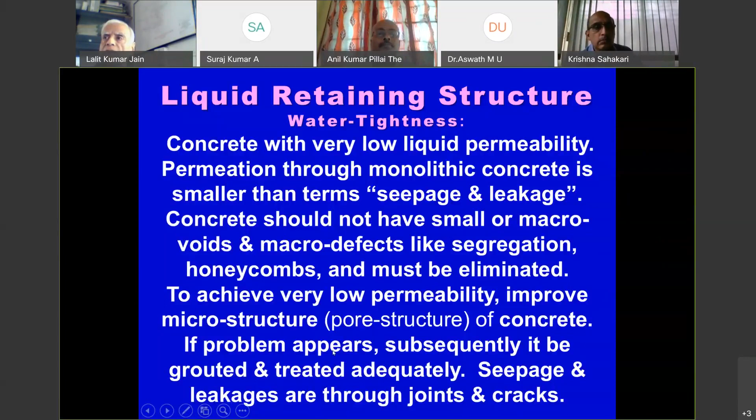Another concept introduced for the first time in this code is the H by T ratio. It is nothing but the pressure gradient driving water through a concrete section - the pressure of water on the concrete section at that point divided by the thickness of concrete. Assuming the gradient is constant throughout the thickness, the average gradient will be h by t. We'll be talking of h by t ratio very much in the code now, since leakage does depend upon h by t.

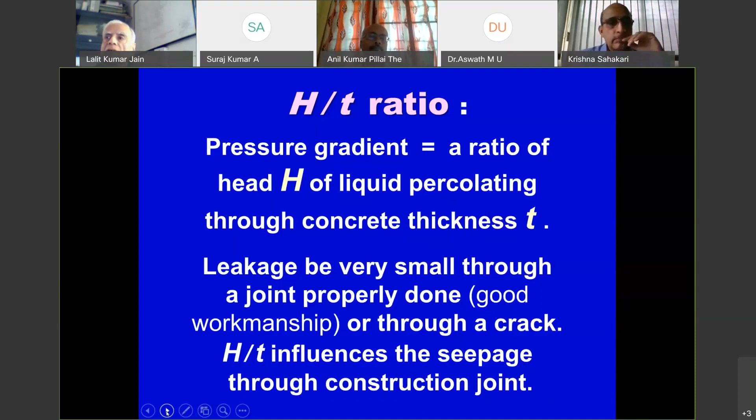Now we already know IS 3370 is in two parts. Part 1 is general features, salient features. We have added a clause on terminologies, and many of the terminologies are added. I've given you an example of construction joint: it is a partial discontinuity in the concrete during construction, an intentional joint which is finally treated to ensure monolithic behavior under serviceability and also under ultimate stage.

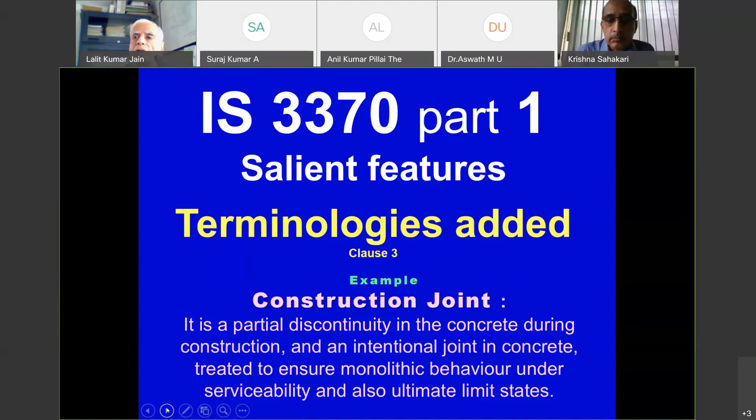Next, there is a clause on materials. It's a very brief clause because we refer for materials to our mother code, which is IS 456. In the guidelines I have given you, you may see a little more detail on the materials wherever needed. I want to make it very clear that blended cements or addition of SCMs, that is supplementary cementitious materials, are preferred for water retaining structures.

Today we get fly ash blended cement. We can directly use it, or we can add fly ash or GGBS during mixing to this concrete. So we can use blended cement. Clauses are there on aggregate, admixtures, jointing material, and reinforcement.

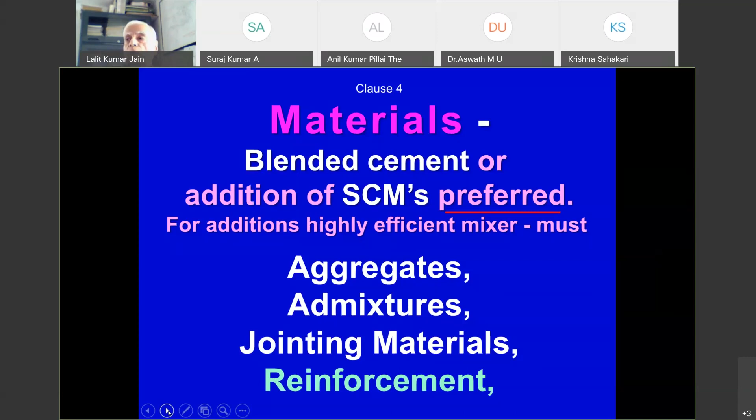Very specifically on reinforcement, I'll tell you that use of fusion bonded epoxy coated bar is included, because many people look into whether it is permitted in the IS code or not. So it is now permitted to use different types of bars, and not only these bars but other types also. But this bar doesn't straight away solve all our problems - we should take high care to avoid scratches in this coated bar.

In this coated bar, that is epoxy bonded coating, if there is a scratch, or what we call holidays or a pinhole position, the rate of corrosion can be 6-7 times higher than it would have been on an uncoated bar. So if those scratches cannot be avoided, then there is no use going for coated bar in the water tanks also. This present picture is from a work being done for an elevated tank in Mumbai.

Stainless steel bar is also permitted. We have another option of galvanized bars. Bonded epoxy coated bars have already been spoken about. India is manufacturing and exporting stainless steel reinforcement bar, but we are not using it - we can use it. But whenever you are using these different types of bar in combination with normal other steel, please note that there should not be direct contact between these different types of bars, and we have to insulate these bars from each other.

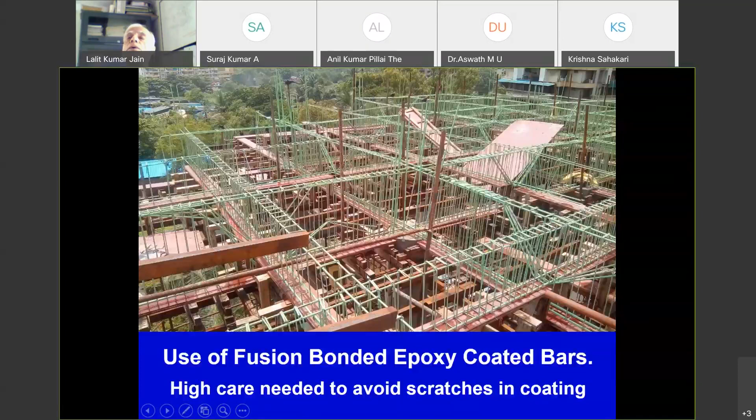We will look into what is exposure condition. We have been getting guidance on these exposure conditions from IS 456, and as per that, there are 5 exposure conditions: mild, medium, severe, very severe and extreme. As per that table of 5 exposure conditions, we place our water tanks in severe. So any member of a water retaining structure, or container or tank, we should design at least as exposed to severe conditions. Of course, in some cases we are exposed to very severe or extreme conditions.

For example, in a treatment plant, we have an alum solution tank. Now, alum is highly corrosive to concrete, and concrete cannot stand to it. So what we do is apply an acid-proof lining, simple China or tiles, what we use in our bathroom, so glazed tiles, that we can put. But the jointing material or pointing material is very important - we put acid resistant material there. So this is how we have to deal with it, and so we can have higher exposure conditions.

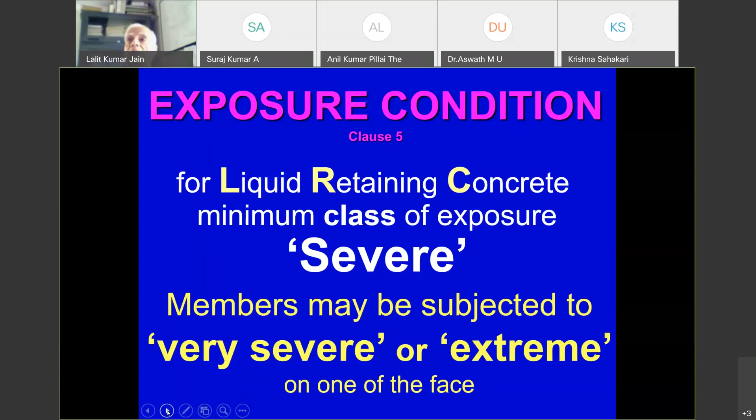We look into this beyond also something else. The modern approach is to recognize the deterioration mechanism which is responsible for loss of durability, and we have to design for durability. Knowing that mechanism, we have to select the grade of concrete, select the parameters, mostly permeability of the concrete in relation to the mechanism - permeability not only for water, but the transportability of many other things like water, solution, gases, ions and so on. Now, the materials which take part in loss of durability in all those mechanisms, we have to understand that and can design.

Many codes of standards are now talking of this approach, and it's possible, but a lot of data we have to collect for the type of concrete we are going to use, and parameters of the concrete, before we take this into account when we design it. So, for example,

the penetration of chloride into the concrete. Most of the time we are using chlorinated water, and chlorides are available throughout the life of the structure, and these chlorides penetrate into the concrete. So what is the rate at which it can penetrate, and when these chlorides reach the reinforcement surface, and this concentration of

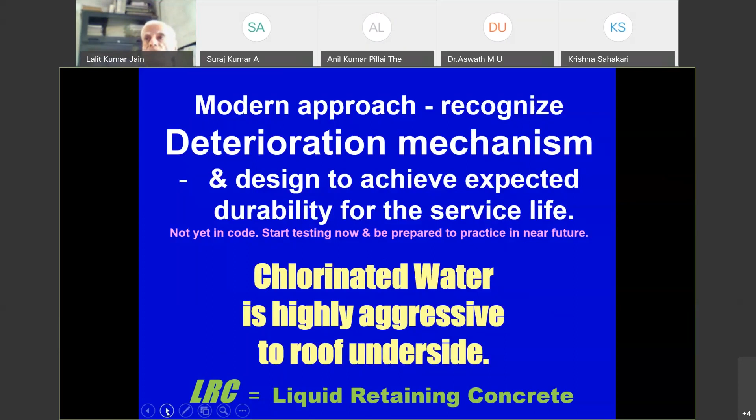Now this table 1 is as it was in the earlier code also, except that we have increased the binder content. Earlier, for reinforced concrete, about 320 kg was permitted. Now we have increased it to 350 kg - not cement content alone, but total binder, the cement plus SCMs, supplementary cementitious materials.

Basically, I recommend that we should not have consumption more than 400 kg of OPC or PPC, because if cement consumption or cement content is higher, the shrinkage will be higher. So if we exceed this, we have to account for shrinkage parameters and design accordingly.

The simplified guidelines given in the code regarding shrinkage design or minimum steel are valid for content between 350 to about 400 kg. Beyond that, those are not applicable, and we'll have to design for more reinforcement due to shrinkage, cracks, and so on.

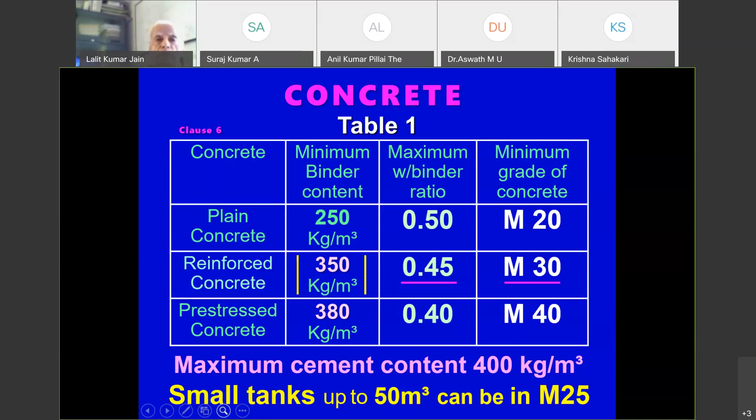Now here you can see that we permit the majority of water tanks in M30 grade, but to continue with the practices we had long back, we allow small tanks to still be done in M25 concrete. And if it is PCC, one can do it in M20 concrete.

PCC means though we put reinforcement, the concrete is safe even without reinforcement, but for temperature shrinkage we'll have to provide reinforcement. Whenever in this code we say PCC, it means some steel we are providing, but we are not depending on the stresses in steel for load bearing due to water load.

Now coming back to durability, corrosion of steel is most important in our water retaining structures. In buildings and others, you will find that carbonation of concrete is one of the important parameters. Here, our concrete is normally wet, more or less saturated, so carbonation of concrete doesn't take place.

Where carbonation takes place, the alkalinity of concrete, provided by Ca(OH)2, calcium hydroxide, which is the end product of the hydration of cement and formation of cement gel, gives us strength. So the Ca(OH)2 which remains there forms weak crystals that give us alkalinity in the concrete.

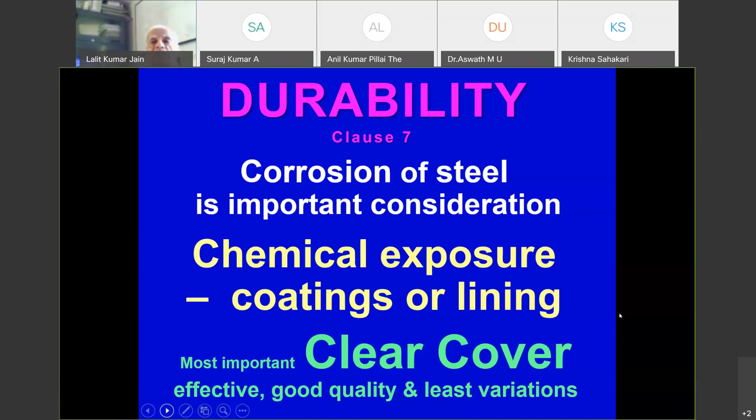There are many site conditions to be considered, which were already in the earlier code. This type of clause has been continuing from the 1967 code.

The clause about earth pressure: when we design groundwater tanks, we have earth pressure from outside. All our earlier codes used to say that we totally discount earth pressure when designing the wall for water pressure from inside, assuming no earth pressure from outside. I want to clarify, don't assume there is no earth outside—only the pressure is very small, negligible. Now we allow and ensure that some small earth pressure, a small fraction of the active earth pressure, will always be there, which we can permit along with the outward pressure.

Design against flotation, what we normally call uplift, pertains to ground tanks or underground tanks, our sumps or pump houses and so on. Here the factor of safety is slightly increased and the clauses are more detailed—to design against uplift you can use the concrete load of additional PCC, earth load on the roof of a tank, and sometimes even anchor piles or rock anchorage. Depending on what mechanism we use for the stabilizing force, we have to apply some reduction factor to it. So these are the new clauses which have been added.

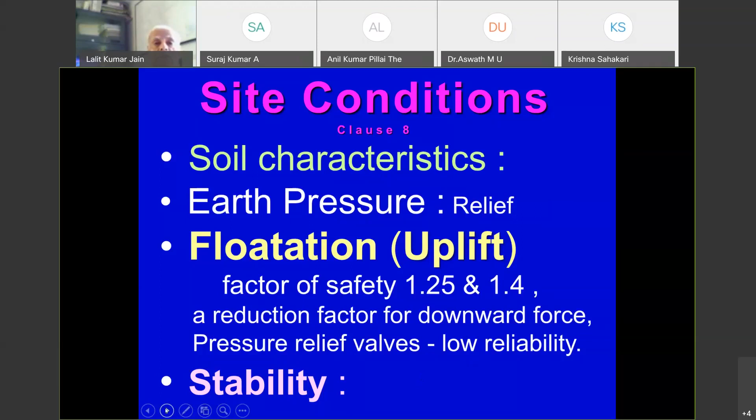Causes and control of cracking. This is very important because cracking is related to water tightness and leakage. But otherwise also, for durability and aesthetics, cracking is important. Where aesthetics matter, finer cracks need to be controlled—that's another thing. But normally aesthetics means a user should not feel that there are cracks and something is wrong. There are structural cracks where nothing goes wrong, and if leakages are prevented, the cracks remain there.

As you know, most of the population has common cold—it's a common phenomenon. There's hardly anybody who will say I never had a common cold. Common cold is with everybody. So all concrete is cracked; cracks are there in all concrete. Micro cracks develop during young age when the concrete is gaining strength, because temperature and shrinkage gradients are there—the temperature changes, heat of hydration and so on. Those changes bring about micro cracks in the concrete, right from when it is 3 to 7 days old, up to 28 days when the concrete is matured and we are using it—cracks are there. But if these cracks remain as hair cracks, there's no problem; these are not structural cracks, and structurally the concrete is good.

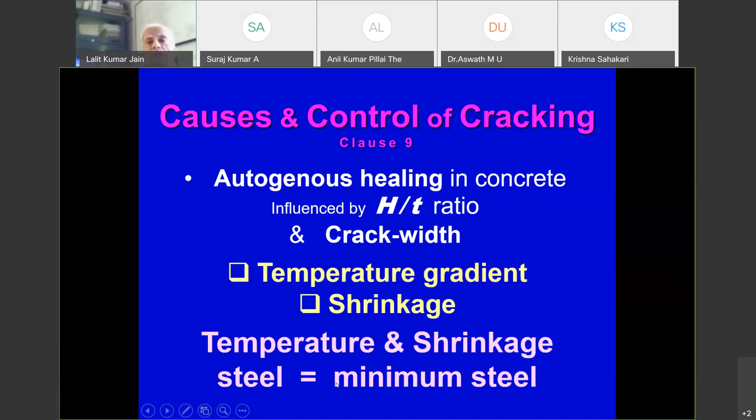Control of cracking is important. So we have to reduce the peak, that is reducing the temperature of concrete, and on young concrete, as soon as we have poured it, external heat should not be given to it.

And concrete should be free of restraint. If we have a slab, pouring the slab is restrained at the bottom by friction from the base, and we can reduce that. We also reduce restraint by providing joints. If they are very big ground tanks, to reduce restraint we provide joints. So we'll see all these methods later on. We have to reduce concrete shrinkage.

Additives are available. We add shrinkage-compensating, expansive additives, so that initially some expansion takes place to compensate the shrinkage later. We can have concrete with low coefficient of thermal expansion, which is basically controlled by the type of aggregate. These are options which are possible, and if these options cannot be taken, then we have to provide more reinforcement.

We can use concrete which has high straining capacity, like fiber reinforced concrete or ferro cement. This gives much better control over cracking. But we still have to come to where you can design a fiber reinforced concrete properly. In Europe, codes are available where you can design fiber reinforced concrete for controlling crack formation.

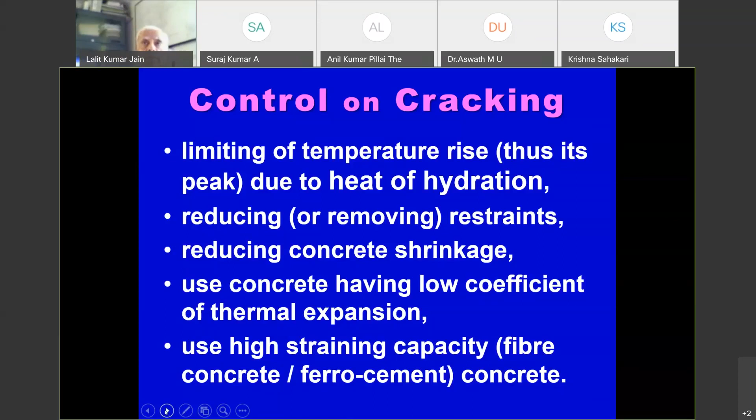There is a small clause on plain concrete in our tank, under crack control only. Normally we avoid designing plain concrete, but for very small members, maybe at the base, we can do it in plain concrete sometimes. We have to have very low stresses in that concrete, direct tension or flexure. The values I am giving here are lower than what are given in the code, because the committee members couldn't agree and stick to the values; there was a difference in opinion. So the old values are retained, whereas in my opinion, the plain concrete value should be as small as given here.

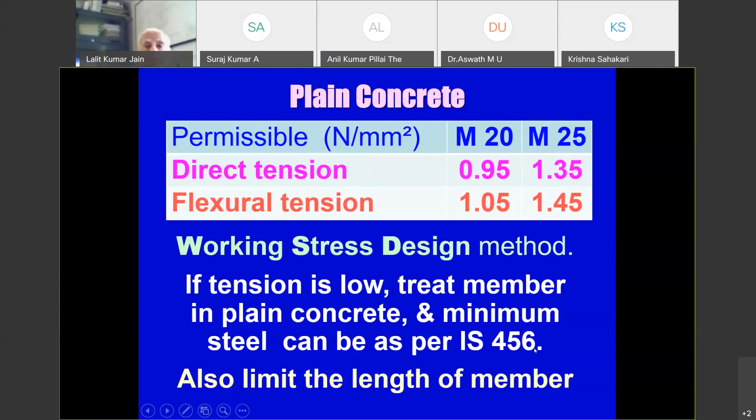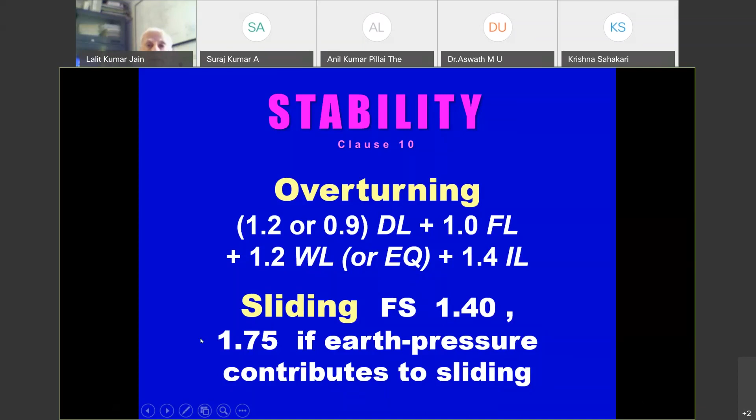Now for stability analysis, combinations of loads are specified. Similarly for sliding, the effect of these is slightly improved, meaning added more. So if sliding checks are required, and if it's normal sliding, earlier the factor was around 1.25, now it is 1.4. But if earth pressure is contributing something to the stability solution, then the factor of safety has to be much higher.

We have joints in water retaining structures. When we talk of joints, we talk of ground tanks, not underground tanks. Underground tanks also normally avoid joints. Joints are only provided in ground supported tanks, and in large ground supported tanks we do provide joints.

We have different types of movement joints where different movements can be allowed. One type is the expansion joint. Expansion joints are provided at something like 30 to 40 or 50 meter spacing. We don't provide expansion joints at less than 30 meter spacing. I have constructed structures where expansion joints are provided, or no other type of joint is provided, where the structure is 45 to 50 meters long. Earlier I used to mention that expansion joints can be provided at 45 meters.

Today, a designer is not constrained by what spacing we should provide for joints. Whatever spacing we choose to provide, we have to design the reinforcement accordingly. Depending upon the spacing of the joint, I can design a structure with 30 meter spacing of expansion joint, or I can design a structure with 50 meter spacing of joint. My reinforcement will be different.

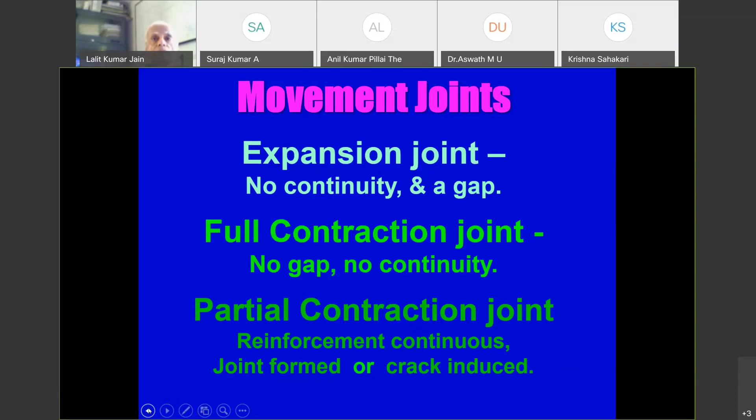When it's a partial contraction joint, the concrete is though not continuous, meaning there will be a crack coming, a separation, but reinforcement is continuous. Now, these type of joints, when reinforcement is continuous, form the interface and we have to design accordingly. Though these were already in earlier codes, how to design, what to design, these things were not given. Now we are given them.

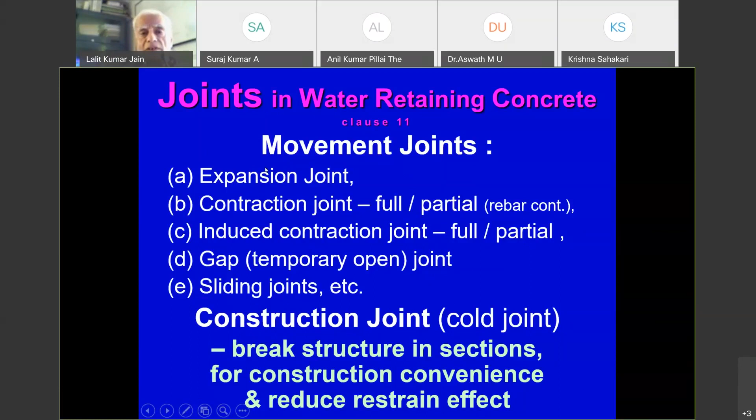Now, the spacing of movement joints. This is something which was already there in the 2009 version. Many of you must have seen it as IS 3370 2009, and in that these options are given. When we provide joints, we have three options, and which option we are designing is our option, not the structure's option.

It's the designer's option. One option is to design continuous RCC without any movement joint. If you decide 50 meters long, between that 50-meter long structure or between 50 meters of length extending joint to joint, in between there will be continuous concrete. You have to design accordingly, and I say the reinforcement requirement will be higher. Second option, the third will go first.

The third option is the joints we provide at closer spacing, say maybe about 7.5 meters center to center. It was there in the 1967 code, which used to say you can provide joints at 7.5 meters center to center. The alternative can be a full contraction joint, and at every 30 meters you can have the expansion joint. So when the joints are at such closer spacing, you require much less reinforcement, but you provide more joints, so your headache of leak-proofing and maintaining throughout the life is more.

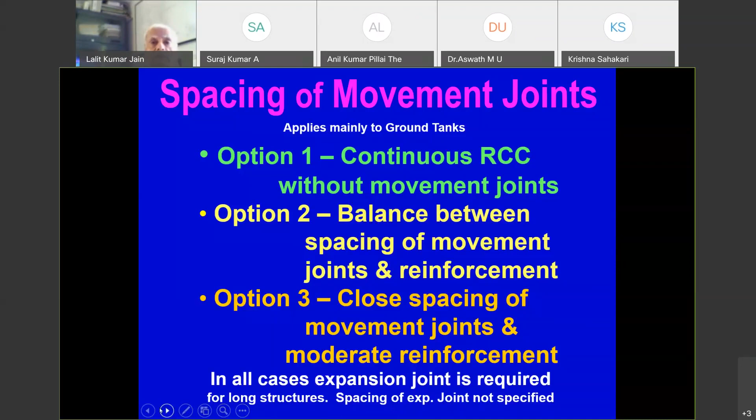For very long structures, you have to provide expansion joints, and we are still not giving guidance in the code to design a very long structure like 40, 45, 50 meters long without a joint. Because if you see the international literature also, say for example ACI gives recommendations where very high reinforcement will be required. So the opinion differs, and hence a definite opinion has not come before. Have continuous reinforcement, whatever minimum you can calculate. Now there are two possibilities — when we talk minimum reinforcement, this code can be interpreted in three different ways.

The minimum reinforcement is specified as 0.24%. That's one option. A second option is to calculate your minimum reinforcement, called rho critical. Rho critical can be calculated, and it will be very near to the given option of 0.24 percentage, but that also depends upon the grade of steel and grade of concrete and so on. If the concrete has high shrinkage, the critical steel will be high.

This thumb rule is not written in the report, but I give you: your steel has to be more than 1.4 times rho critical. It can go as high as, say, for 45 to 50 meter spacing, your steel will be more than double the rho critical. Most of the time, I can say more than 1.4 times. You cannot have an option where you don't have joints or provide only critical steel. You have to be at least 40% higher than critical steel, and this can go to double or more, depending upon your structure, the grade of concrete, and the shrinkage characteristics.

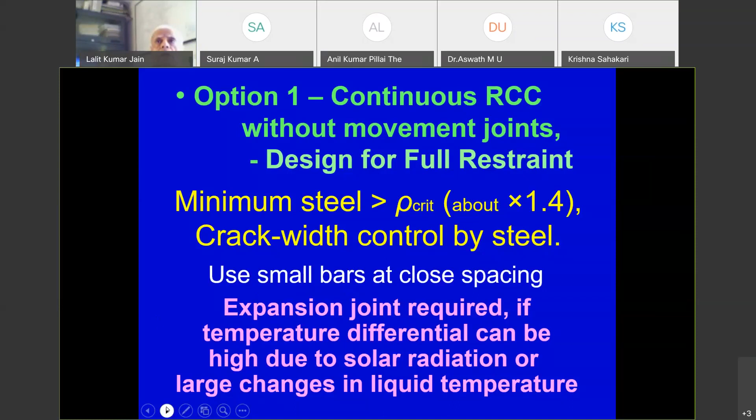Option 2 is already there. We will not go into much detail, but this is as per the 2009 code which was already there, and there the steel will be more or less what we call rho critical - that much steel we have to provide.

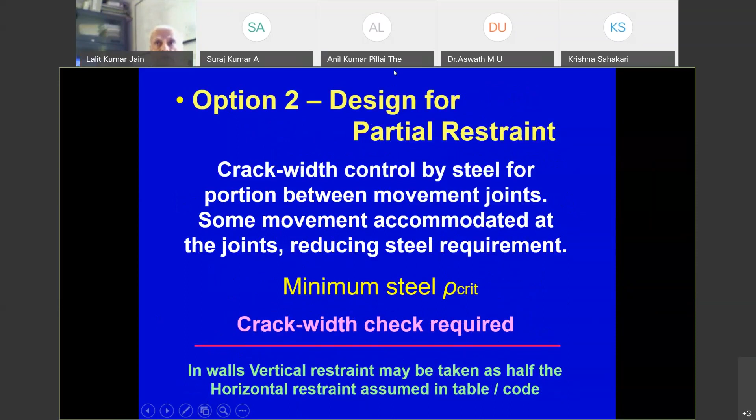Now if you take option 3, if you are very close to the spacing of joints - the other interpretation is when you have a very small structure, say only 7 to 8 meters - that is a very small structure. Your minimum steel can be 2/3 of the specified minimum; you can go less than that. So if the spacing of joints is very small, or your tank itself is very small, you can save on this steel.

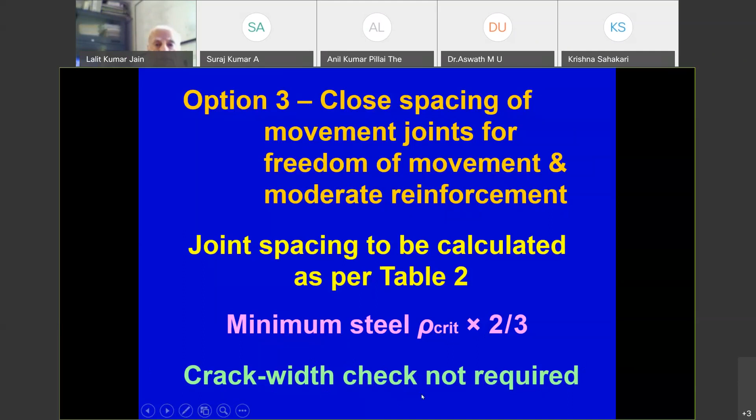Understand that your minimum reinforcement, which is called temperature shrinkage reinforcement, depends upon the spacing of joints. The present philosophy in this code is as per the British method - I specifically say that because if you refer to the ACI code, it is different. The philosophy is a little different, and the steel requirement is higher in the other codes. So what this code gives is as per the British method, something bare minimum. If you have any other doubt or phenomena coming in, you have to increase it.

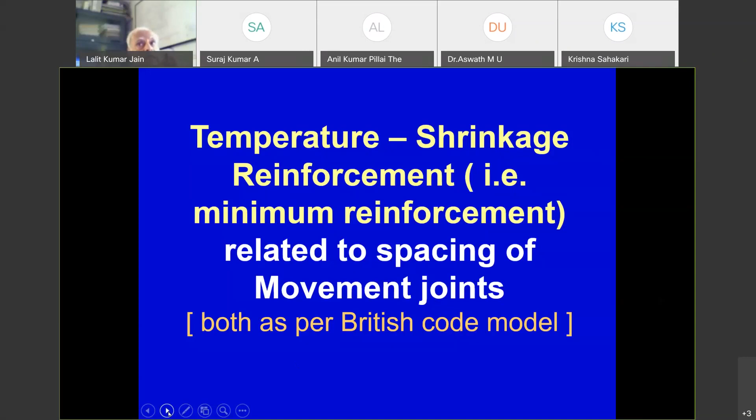Now this I want to say and give importance to: all movement joints are to be designed. What is the movement - how much movement will come at an expansion joint? The material or sealing material which you put in - can it take that movement?

Now there is a method for designing these joints. This method is not given in the code, but the methods are already known - people who do bridges or pavements, it is known there. It is not in the IRC code either, but many textbooks provide this design detail, and here I'll expand my notes to give you those details. But for all these joints and sealants wherever we provide at the joint - the contraction joint also - we have to provide a sealant and design it. We have to know what material we are providing, how much movement it can take, what strain it will fail at, and ensure it will be safe. If my sealant is designed to serve for 10 years, till 10 years it should take that strain safely, and so on.

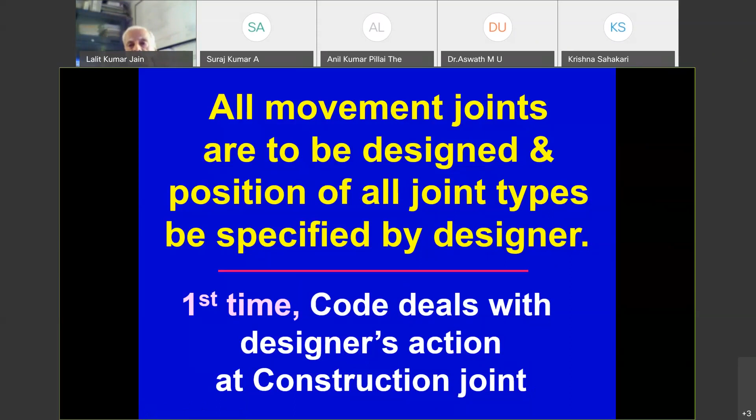Jointing material, there is a clause introduced, though small, because jointing materials are still not covered by many of our IS standards. Some of the jointing materials are covered by standards because they are for pavements. Some joints are in lining, canal lining, and building material. Building joints are on buildings also, and some materials are covered for building. For example, bituminous materials are also there, but in a water supply project, the potable water supply, we cannot use those materials. So we have an additional requirement. So all are not available, but some small guidelines are given.

Now the construction of these water retaining structures is a whole area in itself, so a few clauses are given there, and elsewhere I gave a whole webinar on construction of water retaining structures, for which about 50 or 60 pages of guidelines are also available. So one can ask for it.

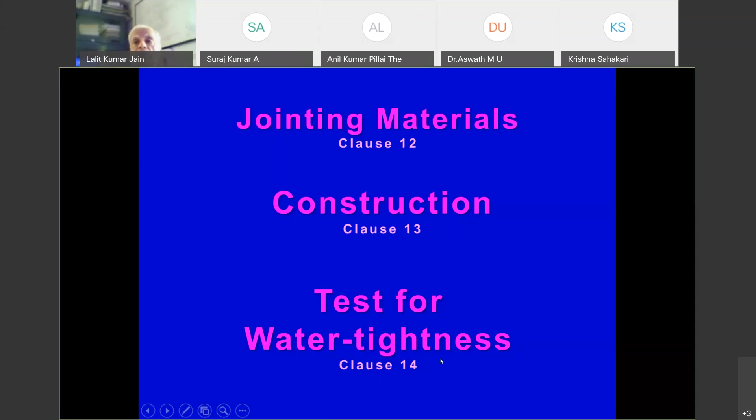Check the last code revision, 2009, where we also introduced that the roof of a water tank has to be checked for water tightness. This was already there; the roof has to be checked for water tightness. If it is not a flat roof, by a hose pipe, you have to allow water to flow for an hour or so and see that there are no leakages below.

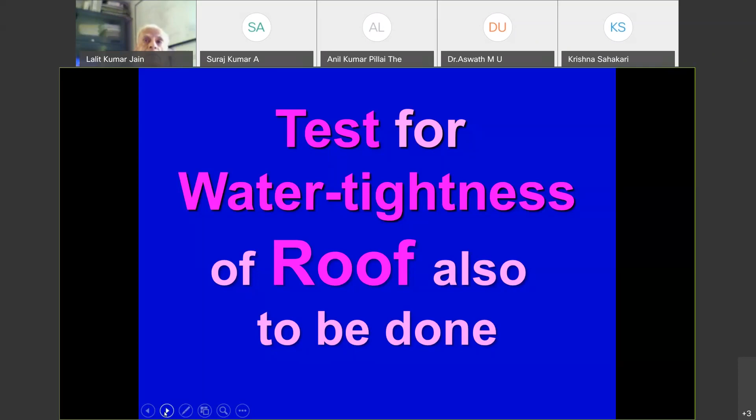This is the end of part 1 of IS 3370, and beyond this, if you allow, we can go today, or look into it tomorrow, and whenever time is available, we can have a question and answer session.